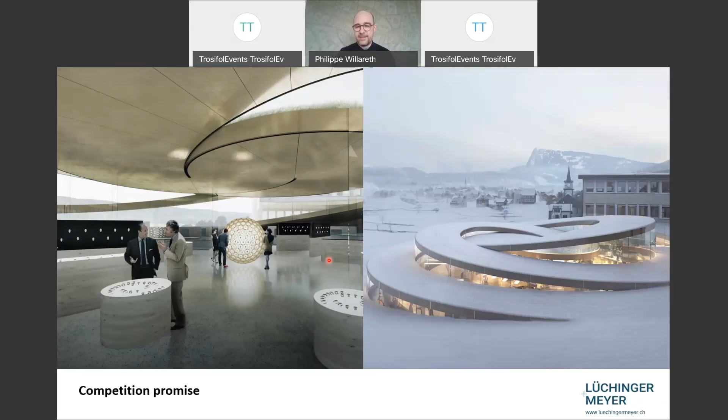I think today we can actually touch three main topics connecting the different projects. One is just the equilibrium, the balance. Structurally, we had to balance the steel roof on the glass elements and have a robust construction. That's one perspective of balancing the project.

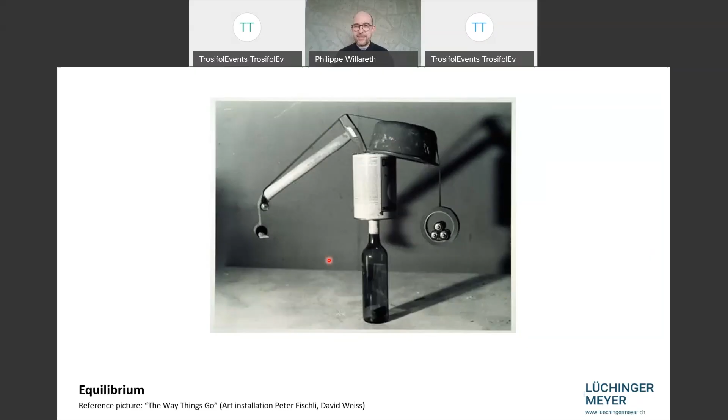The other one was the use, the energy - the design criteria, which has proven to be as important as just structural calculation. It was very much about creating a sustainable glass building, which is not so easy, but also doable with good partners and good products. And the other one is the very high visual criteria from Audemars Piguet. I'll follow up on this in further slides.

Before that, we come to the second topic: the tectonic. It was really about that glass building - working with architects to find the right shape, and also how we would connect the different parts. How the glass meets the steel roof, how it goes into the ground - that was really a lot about how stuff is put together.

On that occasion, we were again exposed to the very high expectations from the client. As you see, watchmakers have a viewing distance of a couple of centimeters to their products, to the very high-end product. Audemars Piguet is really one of the last family-owned watchmaker companies. They develop mechanical watches with very interesting mechanics, and all visual parts are done in special material, in a very nice way.

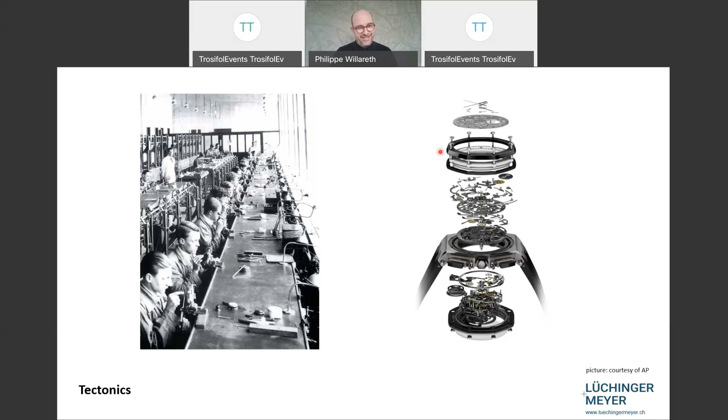That's the viewing distance, and you see the detailing of a watch. It's a Royal Oak, probably the most famous Audemars Piguet watch. You see the bolts, but they're shown for reasons, not for need. That was one point of the project - beside the material, finding the way how we are fitting the stuff together.

And the third part is the material. The project is a lot about brass, a raw, natural material. It's glass too - also a material which should be as raw as possible, coming out of the float plant in an annealed state to create a perfect surface.

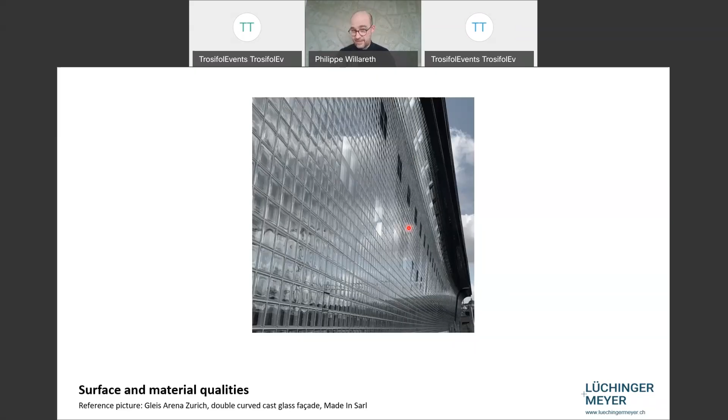This picture shows a project similar in that it's glass, but from a material standpoint, a totally different approach. It's with Made-in Architects at the train station in Zurich, where we worked with glass in a casted way - it has a completely different quality. It was also a project a lot about the expression of the material, the haptic of the material, and how you see it with the eyes, how you notice it in the real building.

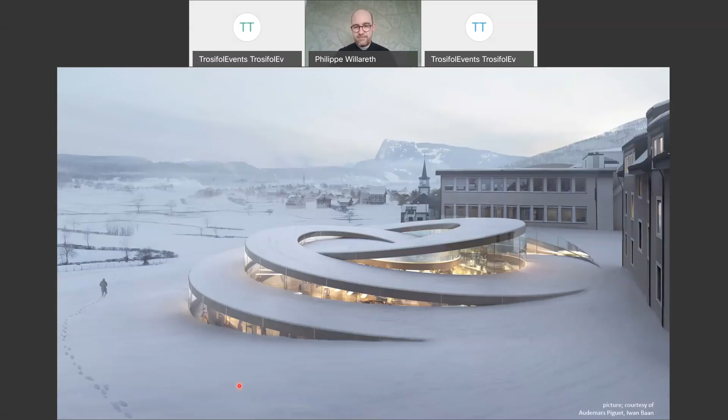So that's how we started into the project, and you see we have a lot of glass. At the end I'll show you a real picture in the same perspective, and I could also show you what changed in the project during that process of developing a glass project, while also meeting high-end sustainable labels.

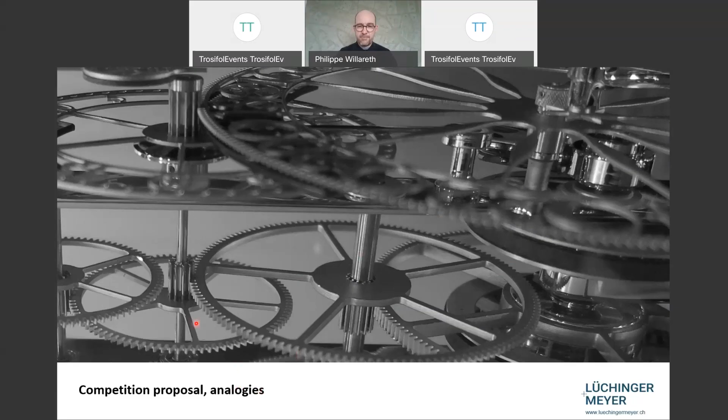Starting on the competition, for us as engineers, we're always looking for analogies, looking into other projects to see how things are done. But also from the architectural point of view, the watch was an important part of the project - finding the shape of the project.

If you unroll the double spiral, you notice you have a perfect museum path in a linear way. In our case, developed as a double spiral, you go into the building, at one point entering the center part, which is a bit larger in diameter, then going out again through the spiral into the historic buildings. That mixture of developing the shape or architecture out of a watch, as inspiration for us as engineers, was a great chance because the shape also defined quite moderate spans.

You see, it's just kind of wound up in a double spiral, and although we have a 30 meter diameter, the spans of the partitions were quite moderate. So that was actually a chance, and that's when we really moved into it and proposed: let's go for glass, and only for glass.

Getting glass into a curved shape, but also using the mechanics of glass as a pressure-loaded component, which glass is very good at. This was somehow, from the principle of how the structure works, a breaking-through point, coming out of different proposals and going into the double spiral. It has an architectural shape that makes a lot of sense for the project, but also gave us as structural engineers a lot of opportunities to have a dialogue with the architects, with the Bjarke Ingels Group, developing the structure of the building in a holistic way for the whole project.

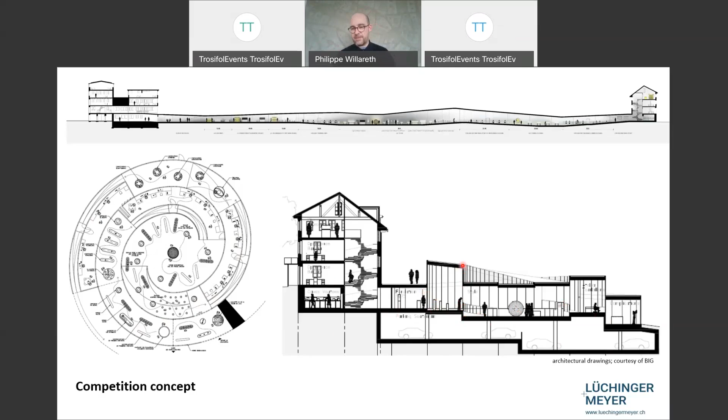But we also had to stack the glass. The load-bearing glass was, on one side, just a partition wall as laminated glass, and then a bit further up it's an insulated glass unit.

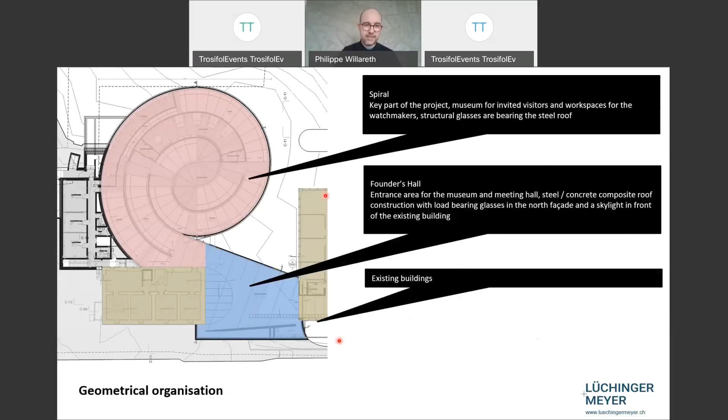If you look at the whole project, we have just the spiral. We have the founder's hall with a flat facade, also load-bearing, the outer part, which was actually decisive for the whole project's build-up. And then we have the historic buildings and the side buildings at ground level.

The project had quite specific conditions from the context. It's in a very rural area of Switzerland, approximately one hour from Geneva or Lausanne, in a valley quite high up, around 1,000 meters above sea level. But it's not going toward the Alps, it's actually going toward France.

That has some microclimatic conditions. One is that it's one of the coldest areas of Switzerland, although it's not in the Alps—with the funneling effect, the air really cools down a lot in that area. So it has a lot of snow, or can have a lot of snow.

On one side it's that powder snow, very cold, but that's not the issue. It's also during the mid-season, changing from winter into spring, when the snow gets really wet and heavy, and it snows again on top of it. So the snow loading was one criterion, but also meeting the architectural context of that place.

So, very cold. On the other side, from the client, there were high demands on sustainability. In Switzerland we work with the Minergie criteria, which tightens up the building regulations but also focuses a lot on comfort. So we had to make a sustainable building in glass, as beautiful as possible, but also with comfort at quite a high level.

So we had the classic facade criteria to work with. One was air tightness and water tightness—important criteria, but also quite easy to meet. The snow loading was a big point; we had to expect 500 kilos per square meter.

But due to the snow drifting on the roofs and the shape, in some areas we had to double the snow load. So more or less on that roof, in some areas we had to expect a ton of snow per square meter. So that's quite a load.

On the right you see the demands from the function of the building—it's very expensive watches, so the burglar resistance, the redundancy, the robustness had to be really high-end. That's when the interlayer, the SentryGlas, kicked in as a product for the first time, so we had to provide glazing that was quite burglar-proof.

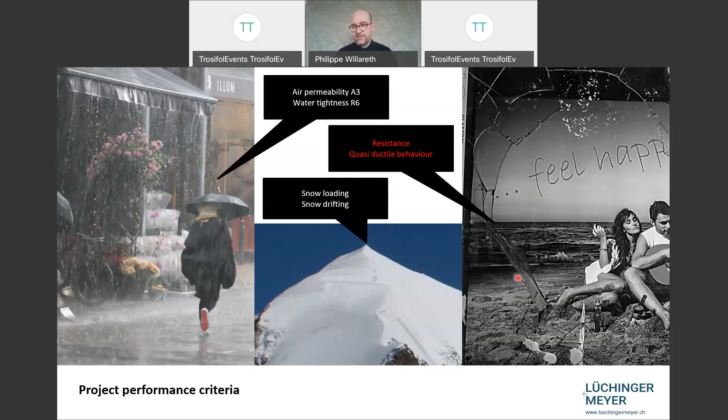The decisive criteria from the shape is one, just the roof drainage. So we had to find a way how we could actually drain the center part. In the competition, we had two steel elements in the center part helping, where the span was just exploding in length compared to the other one, but mainly just to take the roof water down in a safe way.

And I think that was actually one quality of the project. It was kind of not going, once you're going into a process where you just lose precision, where you just ease conditions or have to make it cheaper. No, that was not the case in that project. Of course, we had to look after the money, but it was also a very strong commitment from the client and also a very strong demand from the architects to find good solutions.

And one was, of course, if we go for a glass building, it has to be totally in glass. So the roof drainage wasn't an option anymore. That meant the shape had to be adjusted. So it was just kind of the center part drained out just over the glass. It's working. And for us as structural engineers, one of the main challenges was the robustness of the center part.

That 5 meters of the side span, that's actually quite easy. It's complicated because we're stacking glasses, so from insulated glass unit into a laminated glass unit, getting the forces through, but also having a nice thermal insulation line. In the center part, suddenly the span was not 5 meters, it's a bit more than double, which means a lot of concentrated forces on some glass panels.

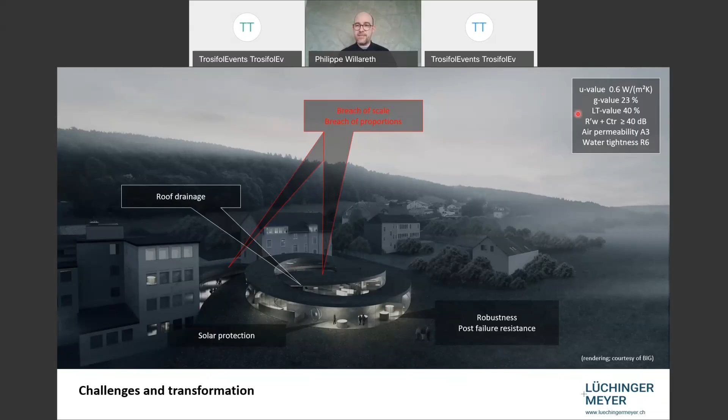Beside that, we had the deal what we have on all glass projects: to balance the G value with the U value, with the shading, and with the transparency and light transmission. And it was quite a good coincidence. In the same year, we won another watch museum, which was very fast in the beginning, but now that project is not built yet. That will be finished, I think, 25 or 27. So a very slow project, but in the beginning it was fast. So we could actually already start to investigate some glass solutions.

But just to give you a bit of context to the other watch museum, this watch museum sits actually really in the center of the Alps. It's approximately 1 kilometer off the Jungfraujoch. You can go up by train. The museum is around 3,700 meters above sea level, and that's really an alpine condition. So first, it sits on a rock just beside a glacier, so actually the access goes through an ice tunnel.

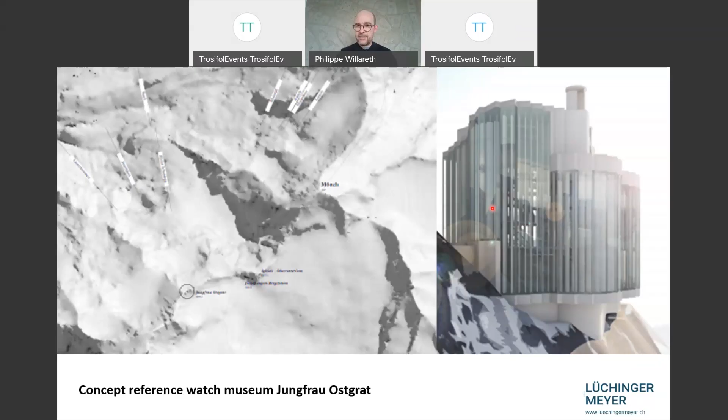And that watch museum was also very glassy, but transportation-wise, a bit of a challenge. Everything has to go through the tunnel. It has to be already quite robust in transportation mode. So on that project, we are working with high transparency. We have also to deal with the shading, just coming to that.

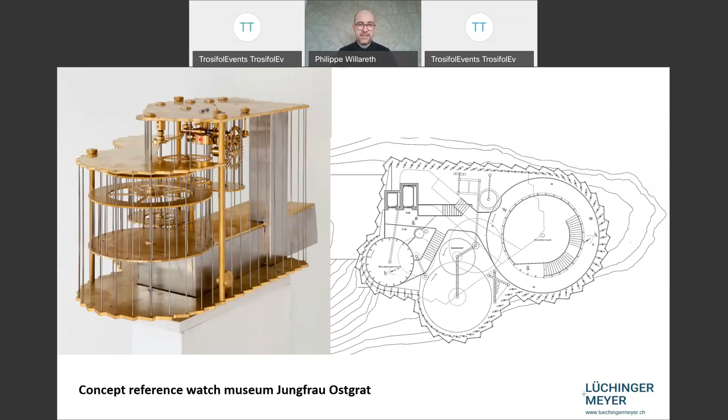But the main building of that watch museum on the Jungfrau Ostgrat, the building itself is a watch. So we have 3 cylinders. The slowest one turns around once in a month, the second one once a day, and the fastest one once an hour. So you're coming out of the elevator shaft and you're in the watch itself, and you experience the mechanics, but also a very fantastic view into the glacier world. It has a bit of an issue that already in minus temperature, and it's almost every day -5 degrees or less, you have an overheating challenge because the sun is so intensive in that time.

So the building was composed with a facade, and as I said, we had to go through a tunnel. It had to be robust. Helicopters were not really good for installation. So first you have to build a building to build the building, and everything has to go in.

So we worked with the transparency, just saying we're building up a truss. The truss is the channel, actually the energy channel. So the sun heats the facade, and the heat, the energy just goes straight out in that spatial facade structure. The energy which is too much is already out of the building again.

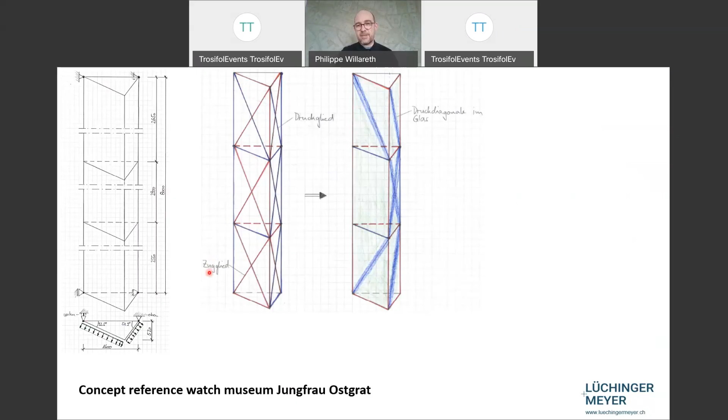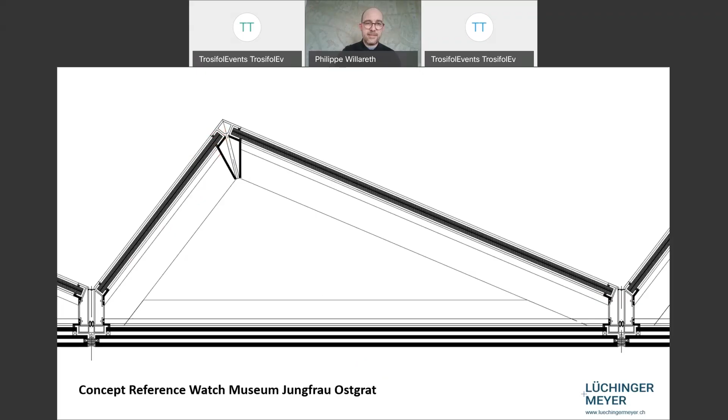On that project, we have an interior insulated layer, and then we have the glass elements in quite a robust way, by the pressure caps from the inside glazed, but the load from the diagonals goes through the glass. That was actually the idea which we developed on a side road and which we're taking into the Audemars Piguet project. On this project, of course, the glasses are much larger, much more heavy, but from a pure structural point of view, the glass is serving in the same way.

On the Audemars Piguet, we have the steel roof sitting on the glass, and the steel roof is quite an important part of the project because it has to make sure that it's quite stiff in plane. So the roof has a lot of diagonals. You have to make sure that the roof is stiff and transferring the horizontal loading quite equally in the glass elements. You have to manage in seismic loading, you have an action, and that action has to go to glass panels, and it has to distribute over several panels so that you can take the horizontal loading.

It's really clear those glasses are not just a pendulum column taking the heavy snow load on top of it. So that's actually the easy part. The difficult part was actually to provide the lateral stability of the building with glass units.

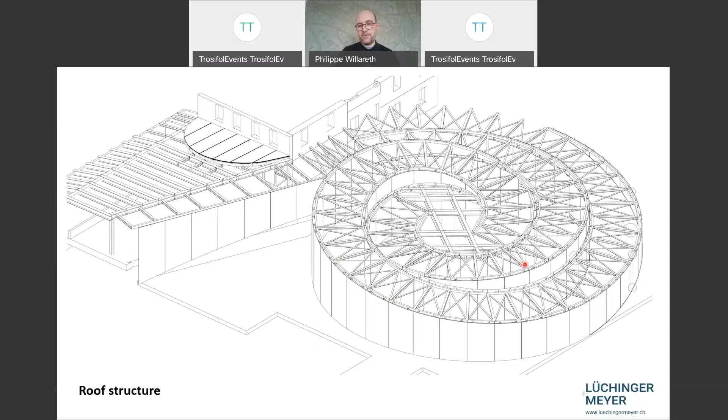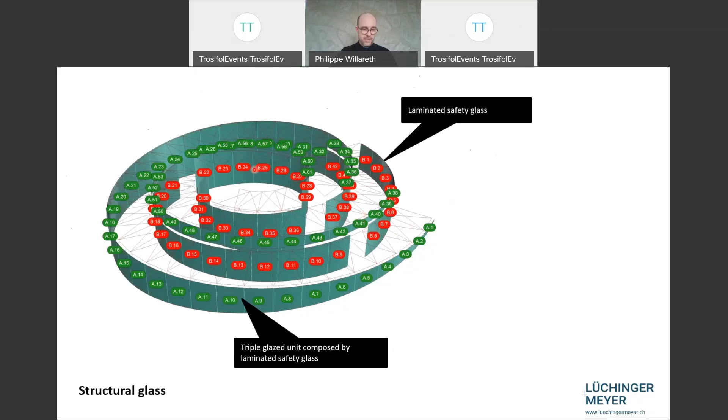Just the organization of the glass structure - the green panels are triple glazed glass units, providing quite a good U value of the thermal envelope. It's really the green one, and at one point the green one goes on the red one, and the red one is actually just a partition wall, providing the volumes inside the building, but also picking up in the center part the concentrated loads. So we were able to adjust the glass build-ups in those places.

If you see the glass as just graphically as a simple component, we have the support at the top where we're getting in the compression loads, but we also see the horizontal arrow showing the lateral forces, which brought us in some load conditions to the situation that we have a lot of pressure on one side because the glass wants to tilt in that direction, and a bit of tension on the right side.

That tension was so little for the glass, it was not a challenge, but of course for the connection at the bottom, at the top. And on the right side, the compression force in the glass was a bit of a challenge due to the stability, but mainly to actually get the concentrated forces from a steel component into the glass.

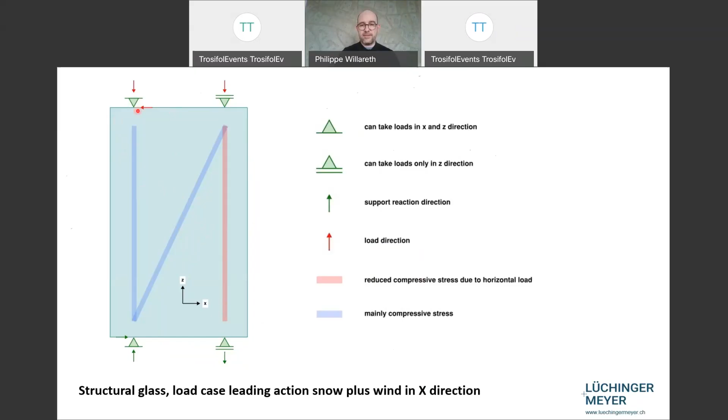The solution was to provide a shoe where the glass sits in. Where we get compression forces in, we used epoxy mortar to get really from this metal component through epoxy mortar, the compression forces into the glass. That's where we have the compression pads, or so-called pads.

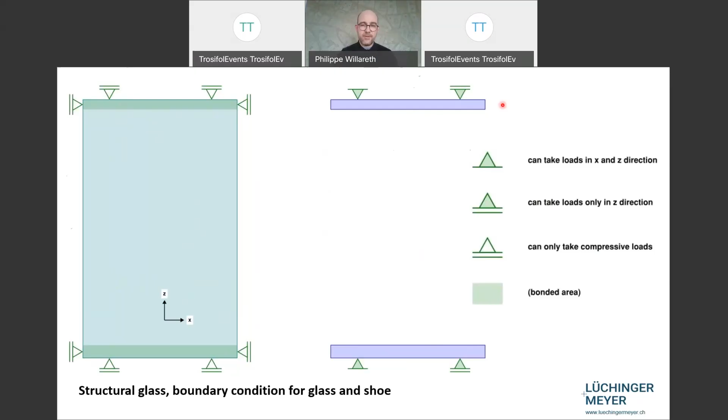And for the tension and sidewise stability, we used silicon to have the glass embedded into the steel shoe in quite a nice way. So those forces are just distributed over the silicon - a very gentle way of introducing the forces into the glass.

As structural engineers, most of the time we like the clear load path. In the beginning, for a while, we were tempted a bit to say, okay, in the shoe we have point fixing, so we actually really know where the forces are going into it. But for glass design, that's not really the best way for the glass, for the material properties.

In the glass, it's always the micro flaws that are the point where it starts to fracture. Around the fixing point you have the stress concentration. So just thinking as a structural engineer, it's a nice concept, but coming from the material, it's not really the solution.

We couldn't introduce high forces into glass. That's why we went into a solution where the glass has a bit of shape, so it fits into a steel shoe and provides a nice silicone joint in the visual area, but the glass is actually just form-locking into the steel shoe. The steel shoe is injected with Hilti epoxy mortar, where you have the concentrated forces, and you see the hinge of the structural system.

The glass can just tilt inside, out of plane, without any restraints, but sidewise it's actually the point where we get the force into the steel and from the steel into the glass.

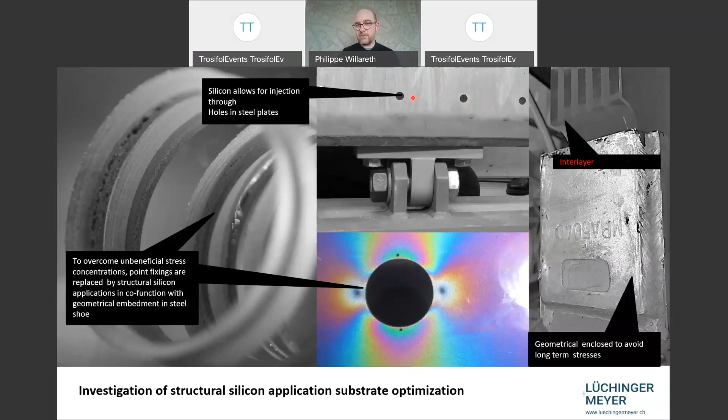So that was the pure technical, tectonic side - how we get the glass into shape so it can take forces. The solution was really to give it form, being embedded in silicone with pressure pads. The other important topic was the surface quality.

That's really where you get back into the watchmaker's viewing distance. It was not an option for the client, Audemars Piguet, to have the glass thermally strengthened, where you'd see that surface distortion. That was a total no-go.

Structurally, of course, we would have liked a stronger glass, to get the forces in a better way, to have better thermal resistance, but this was clear from the second meeting - the client would never accept glass that doesn't provide very, very high visual quality. That was, I think, our largest challenge, the point that woke us up at night thinking, an annealed glass, how are we going to make it work?

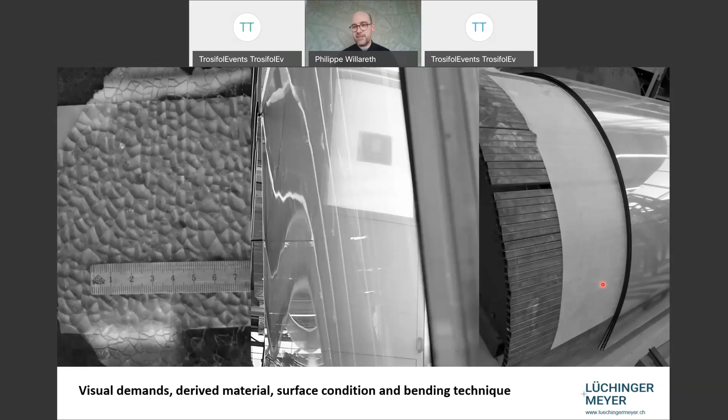But it was really worth going that route, with the assistance of the industry and other consultants, to get the glass into a shape with an edge finish which allows us to use a nude glass, as curved glass.

Early in the project, prior to going into tender, we had the chance to build a mock-up, for several reasons. One was for the client to see the glass quality, to prove on the mock-up that the glass on the building is in a perfect shape, not like what you see at trade shows - fancy curved shapes that look distorted when viewed at a flat angle. That was really our fear, and the client's too, that we'd do a great project but in a small viewing distance it wouldn't meet the quality.

On the other side, the early mock-up was a way to prove that the base principle of the load-bearing glass works. So once the mock-up was finished, all the columns were taken out in the front, so we could really show that in principle it works. For us as engineers, it was also a chance to get the feeling of the installation sequence and confirmation of the technical principle of joining the components together.

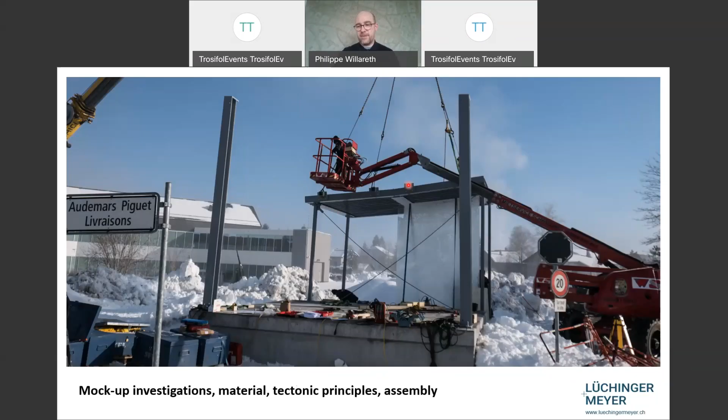You see the large glass units lifted in by the crane - about 2 tons which are juggled around, which you have to get into place, lock up, and load in a controlled way.

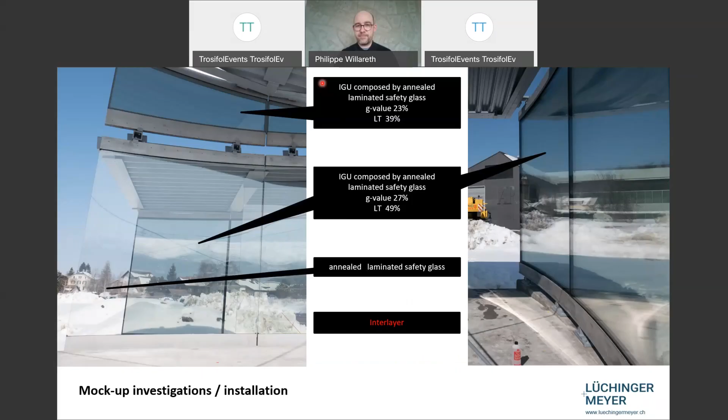A further question was the coating of the glass. On the right side, we see at a flat angle very good quality of the glass. But we also had to meet the sustainability criteria.

The partition walls, you see that's an annealed glass, laminated 3 x 12 millimeter annealed glass, no coating, super transparent, super finish. And then behind that, you see what was our proposal to the energy guys.

Let's take a glass with 27% G value, and the rest of it we maybe can compensate with PV cells, to find a way to have quite a bright building.

At the top, the small panels, that was the proposal from the energy guys with just 23% G value, quite a dark glass. And that was the point which we were a bit nervous about, just to build a project.

And of course, in the end of the day, we had to follow the proposal of the energy engineer that we had to control the sun intake, the solar load.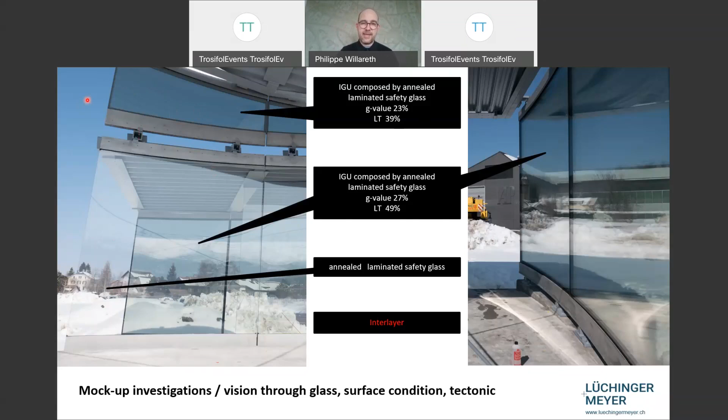So the building is going to be built with that 23% G value, quite dark if you see it, and if your eye is building up a reference to the clear glass or to the sky, you think it's a bit of sunglass. But I will show you the picture as finished.

After the mock-up, the tender took place quite quickly. Frener & Reifer joined as a specialist facade contractor, having a lot of experience in structural glass.

They had just finished the Steve Jobs Theater, a not insulated building, but with a lot of competence in structural glass, and also all the building physics as a facade consultant. They had a lot of experience.

So with Frener & Reifer, we start the process in the execution stage. One thing was, again, quite early, to have reference samples.

This is the first samples at the works of Frener & Reifer, showing again the quality that now as it's tendered out and contracted, that chain is working well.

On the right side, you see the structural glass build-up of the load-bearing glass, with the annealed glass, the SentryGlas interlayer, and then the insulation build-up, or the build-up of the insulated glass units in front of that, forming one holistic component.

That was quite an interesting process because we could bring some ideas into sharpening the process or the design, using silicon to spatule the non-visible areas just to avoid light coming in from a side you don't want.

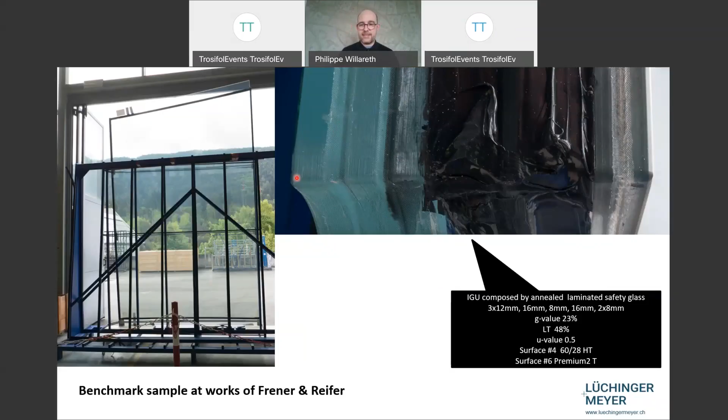So if you look into the shoe, it's just perfect black silicon, and not a bit of light going into the shoe from the side.

The structural testing of that project was, for one reason, going to the last point of the project - actually to prove the robustness, the structural robustness, how we're getting the concentrated loads into the glass.

Those are the small samples which we did already in SD, at Lucerne University in the lab. We were already testing how we're getting the load, the concentrated load into the glass, also developing the feeling for that project, what's the solution.

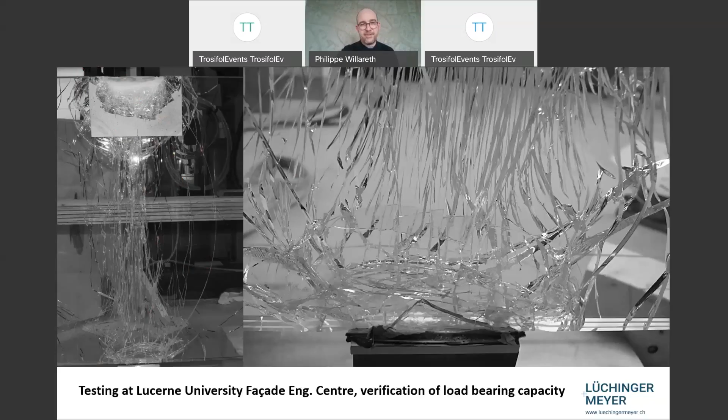It's always interesting to see those glass mock-ups, test specimens. Also, you can read a bit the stresses in the glass, how the stresses are in the glass. It's always breaking particularly. But it's also impressive how the glass just explodes if it breaks at a high stress concentration. That was just the small samples getting into the project.

But being on the way of execution, we still had the hot topic of the burglar resistance. That was solved, but everyone was like, it's a glass building, very expensive watches, millions of Swiss francs of watches just displayed. That was one side route, where everyone wanted a confirmation of how good the glass is.

For us, we were interested to know what's happening if one glass fails totally - if it's broken from both sides due to damage by burglars or whatever, we wanted to prove the post-failure resistance. We also wanted to prove on the exact detail how the load transfer of the final design works, and show that the glass can take more load in an accidental load case, if one glass is taken out and it has to be transferred to the other glasses to the side.

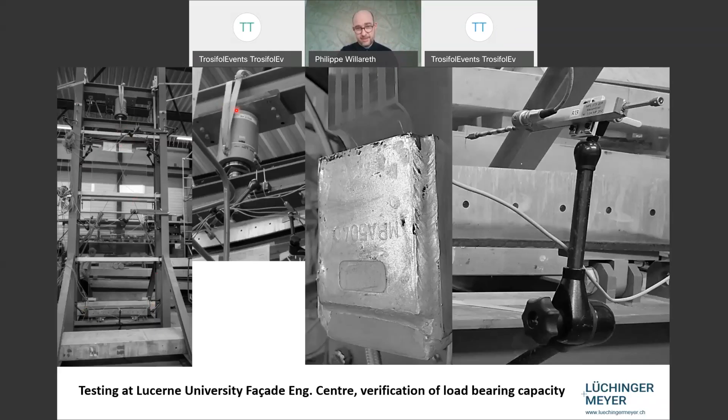So it's a glass specimen here. It's one of the central glass units in the center part of the spiral, where we have 5 times 12 millimeter annealed glass loaded up, and kind of the test rig with hydraulic jacks, taking a lot of measurements.

In the end, it was quite successful, very successful in the test rig. We had also to break the glass to get it into a state where all exposed glass was broken. That was also a bit of a breakthrough regarding the consideration of burglar resistance. It was really impressive how much mechanical force you had to put in just to break one glass, and then you still had more layers of unbroken glass.

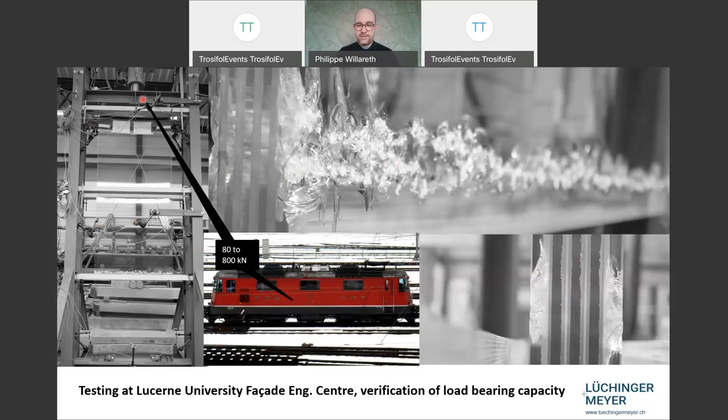We did the same on the other side. The glass component, 5 times laminated glass, annealed glass with SentryGlas interlayer, 2 panes broken, was still able to take 80 tons, or just the locomotive on the glass for quite a while. We had just a weak loading on the post-failure situation. So that was actually for us the last important step before bringing the glass to site.

And for us, it was really striking how nicely the glass was produced, how nicely it was installed, how good the design was. But I think one of the main points is really the transparency you experience in that building.

Shown on the situation where we had the mock-up with the different glass samples, the eye was always referring to what you see, what the glass is, and on the left side it's just no glass or nude glass, and that made the glass quite dark. In the Audemars Piguet Musée Atelier, you're just in a glass world. You're looking through a lot of glass, just imagine you're in the center part.

You have a package with 5 times annealed glass, 12 millimeters. Then another partition wall of 3 times 12 millimeters, and then you get to the facade, again 3 times 12 millimeter glass plus the IGU on the outside. So you're in the building and looking through a lot of glass. It's all low iron glass, of course. The facade has just a coating to provide the low G value, but in the glass world, the eye isn't building up a reference, and it appears totally transparent for the visitors.

So I think, the first time I was on the project it was still a bit the building site. It was very, very nice to see how nice the transparency is, but also the precision of the execution.

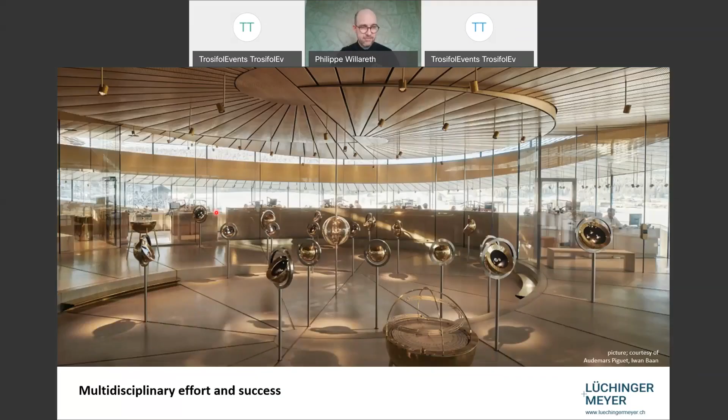If you use insulated glass, you need the spacer, the sealant of the spacer is a joint, and I'll show you on the next project what it means in dimension, but on this project you just have those small black lines. And if you have the right viewing distance, it just disappears into the construction. So I think it convinces in a very natural way. And from the outside, that's actually the same view as the rendering.

You see kind of the double spiral. What you see is really a building which is very beautiful from the outside. In summer it's green, but then you have just the realities. One is, of course, the balustrade. I think that's just what it has to be.

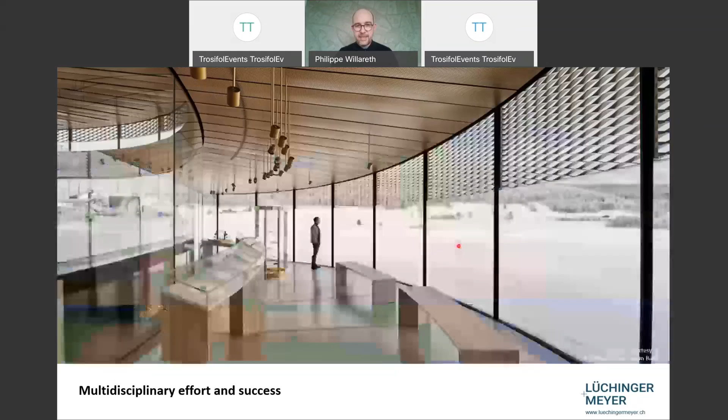On the other side, the topic of having transparency versus the G value versus kind of an exterior shading device. I think that was quite a good marriage in the end. If you're on the inside, the brass is really kind of brass in natural state, very beautiful, building up a nice patina, but it's always above eye level. So if you're in the building, you just look through the glass, and if you look up, you have a nice pattern provided by that bespoke shape of that shading device. So I think it was really kind of, that's, I think, very beautiful.

And there was also kind of, from the BIG group, just kind of focusing also on the blinds until it was really kind of meeting the project. And for us, a big pleasure to be kind of part of that team as facade and structural engineers.

So as I said, it's a project that requires partners. One is just, of course, the client and the architects, but also kind of Frener & Reifer as a facade contractor, but also kind of the industry actually supplying the product that you're able to build such nice projects. But also kind of small players like thermal assessment from glass for concept, just helping us with kind of the thermal robustness on the glass, just on the edge, to get actually the annealed glass into the project without glass breakage due to thermal actions.

The last project, which we're just kind of touching a bit, is a project we're working on right now. It's a project which we started last year, and it's in Copenhagen, just next to the Royal Opera, in that kind of new island sitting on top of a car park. And it's again a glass pavilion in an organic shape, quite tall glasses, very transparent. We were just able to join that project at a bit later stage.

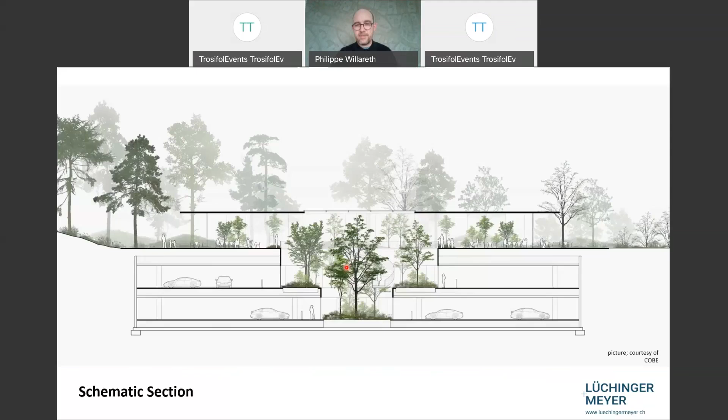And if you're looking into it, it's kind of the parking area on 2 levels below ground. And then we have just kind of, that's a rendering from an early stage, kind of the roof in a very slim state, and the glass taking up some loads.

Having a bit a closer look on the project, actually starting already really in the logic. Yes, it has to be structural glass to achieve the transparency. We had a second look on it, and that was mainly coming out from the office in Lausanne. They were just acting as structural engineers on the project, and we are from the Zurich office doing the facade design. And although we have just been separated due to that COVID stuff, it was quite a good dialogue developing stuff.

And they brought a really cool idea from a structural point of view, which was actually having a real impact on the facade. The Audemars Piguet Museum, as a reference, we have just kind of only glass. Everything is glass. We have the steps, the roof structure is not kind of spanning over 2 elements. So it has a lot of similarities, but we have not a continuous roof structure, just in the line perpendicular to the glass, and it's only glass.

On the pavilion in Copenhagen, we have a larger kind of diameter, it's 45 meters, but we have some opaque elements and the glass line, and then the elevator shafts. So there was just kind of a different context to play with.

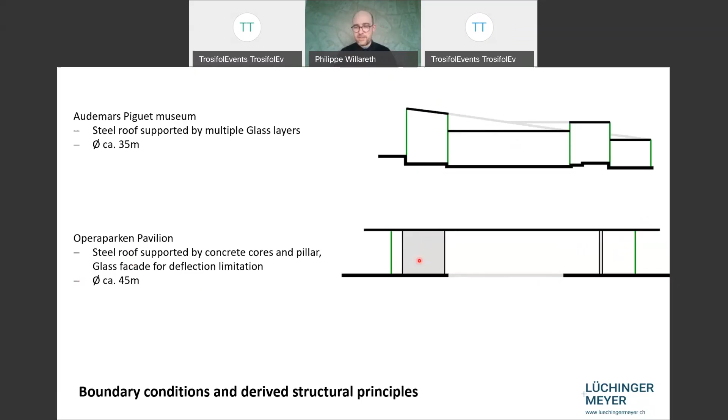And that was actually, I said, we were again in the glass world, and the idea coming from the structural point of view, we could actually pre-stress the roof. So we have very few areas where we have just solid parts, which are ductile, easy to handle, and then we have huge cantilevers and the glass. Of course, that's a difficult match, the cantilever going up and down, or particularly going down. On the right side, on this project, the glass is only a pendulum column, only taking compression forces. The horizontal forces we can take through the shaft.

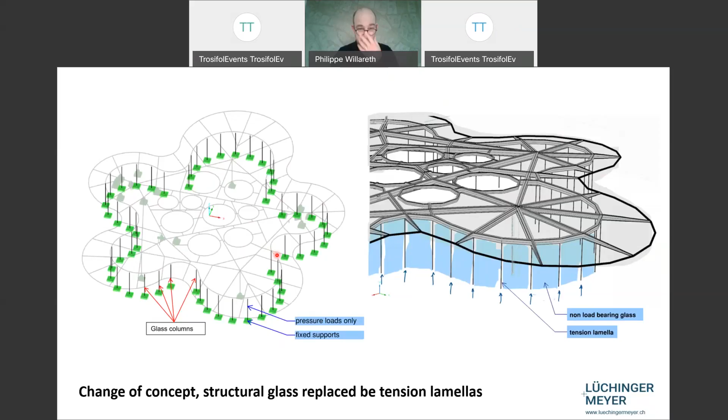And the idea of having a pre-stressed roof was actually in the joint of the glass, we have a kind of column. And the column is actually a pre-tensioned lamella pulling down the roof. So that needed a bit of effort to explain also to the project partner, because from a first point of view, you have a cantilever and you pull it down. That was actually the proposal, freeing the glass from many restraints, making the glass more of an infill, but getting all the complexity into the joint.

You see, we have the cores where you have the elevator in, you have a column, but then you see it's a lot of span and a lot of area where you have only glass. So it's a much more hybrid element or hybrid structure. You have a bit of traditional elements, you have a facade line, huge cantilevers, and we changed from load-bearing glass, picking up the cantilever, to tension columns, or pre-tensioning the roof.

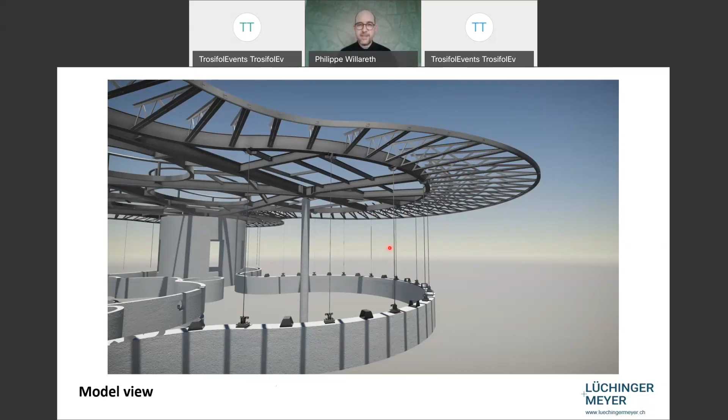And we built a small mock-up in the office just to explain the effects, how we want to make it work. Basically on that mock-up, you see two cantilevers. One is just going out in a straight way, and the other one is going up quite a bit. And then we take a rope and pull it down, so it goes down. The cantilever, without the pre-tension down, if you put weight on it, it just sags down, just a natural deflection. If you put the same weight on the cantilever which is pulled down, nothing is happening as long as the weight is less than the tension force down.

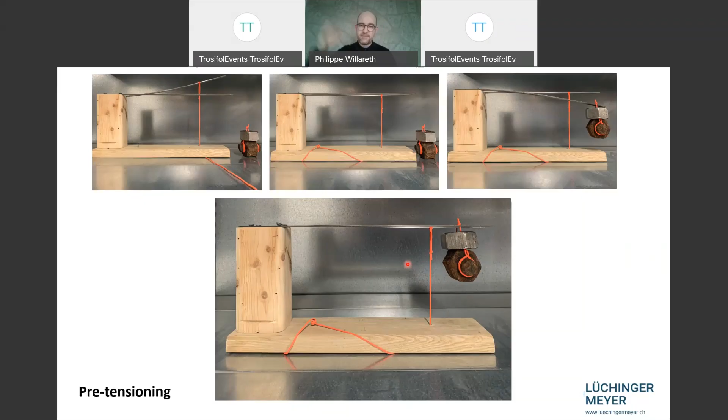That's actually the trick or the innovation of that project, that we're pulling the roof more down than we have snow loads and build-up loads. So just to illustrate it in an easier way, that's the mock-up: if the weight is hanging on the pre-tension cantilever, nothing is happening. If you go to the other one, your cantilever goes down. That solution would require a glass column below.

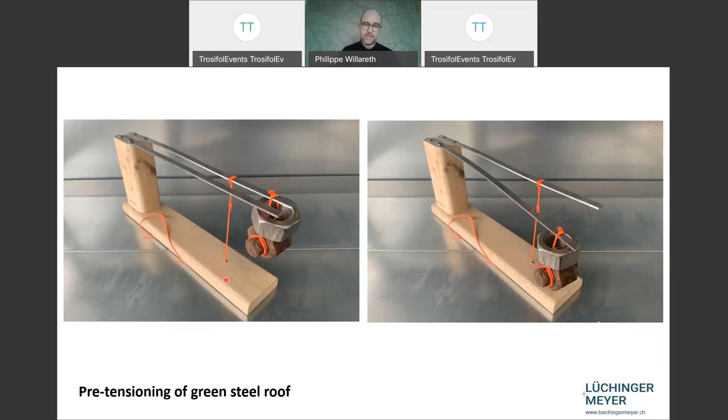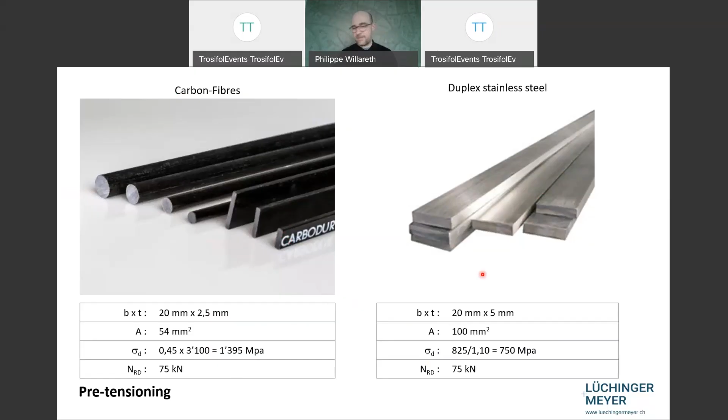The other option, if you have just a tension element, the pre-tensioning, you could actually start to hide that in the silicone joint between the glasses. We need a lot of force, around 75 kilonewtons design forces. There's a variety of different materials - of course carbon fiber is super good, but not so easy to get the forces in. At the end of the day, we went with stainless steel, with a lamella 20 millimeter by 5 millimeter, which would start to play with the joint width.

I'm just saying, at the Audemars Piguet, which is very transparent, we have two joint build-ups. One is just the one from the insulated glass unit, which is basically 55 millimeter by almost 100 millimeter. That's actually the opaque element into the transparent glass unit - just a matter of fact, it has to be like that. Or the inner wall where you have a structured glass build-up with the silicone infill, 15 by 53 millimeters in diagonal. We have that width of 52 millimeters.

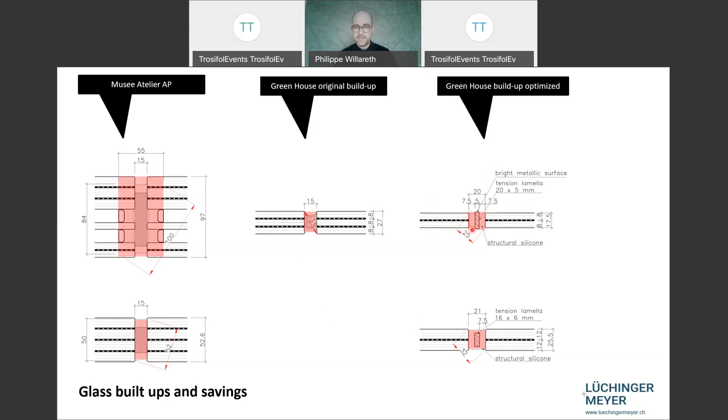On the greenhouse, at the start point where we joined the project, we had a structural glass element 3 times 8 millimeter and the joint build-up, all taking up tolerances. Our proposal was aiming for a solution where we have the tension lamella in that glass joint. So the joint gets a bit wider, the glass build-up gets a lot more slim, only 2 times 8, which means the diagonal of the silicone joint is pretty much the same or a bit less. We have 25 millimeter in diagonal, there we have 32, or we start to embed the tension lamella into silicone, so it's fully hidden. So you could actually have carbon fiber in that joint hidden as well.

So starting with that, we are beginning again to talk about tectonic principles in the facade. First, the fun starts a bit - it's like the fun of having a structural system. It works, but then the detailing starts afterwards. So you have to have a good bracket for the glass.

But the main topic in that project is actually how we play around with the tension lamella. It could be a tension lamella being quite slim, looking out on both sides, or it could go into the building like a knife - on the outside it's fully flush. You could embed it, or turn it around to have it be offset, so you have the glass layer and then just the so-called piano wire pulling down the roof. That's how we are working on the second project.

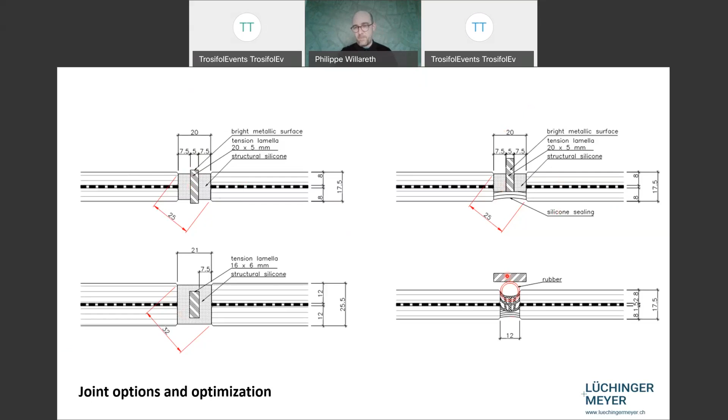Coming from the Audemars Piguet project, which had load-bearing glass, on that project we could free the glass a bit from the load-bearing function with just a very small tension element, providing better transparency because it's only a third of the glass - only one interlayer between, not two. So on one side it's cost saving, but also, I think in the end, the pavilion project had the context of some small big build-ups - shafts with elevators, a couple of columns. I think we're just making the building much better with those elements.

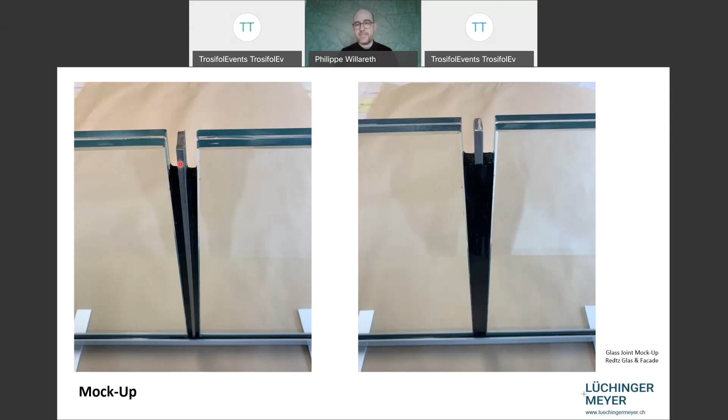It's a project now going into execution, but we have a different technical context from the structural system, providing a very transparent facade on one side, tensioning down the roof, and on the other side we have the Audemars Piguet Museum, which is fully load-bearing and already built with nice, slim joints. So that was the journey I wanted to take you through with structural glass and interlayers, showing the benefits of those complementary glass interlayers, structural silicone, and these. Thank you very much.

Wow, congratulations. Well done, Philip. That was a fantastic presentation. Thank you. There have been a few questions that have come in - can I put some questions to you? Hopefully you'll be able to answer them for me.

There was a question that came through mentioning that the design process originally for the spiral involved a few other parties, and you credited Bjarke Ingels as one of those. Who actually came up with the idea of the spiral? Was it yourself?